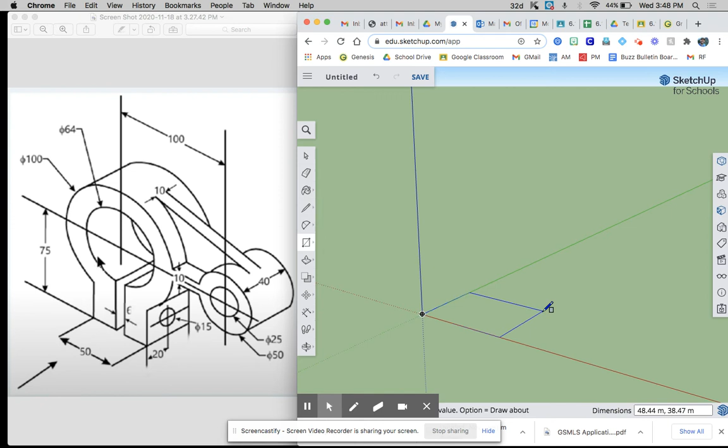Just to make the base, it says that this is 50 units wide, and here is 20, that's halfway, so the overall length would be 40. So we're going to start by making a rectangle that is 50 by 40. We have that, great.

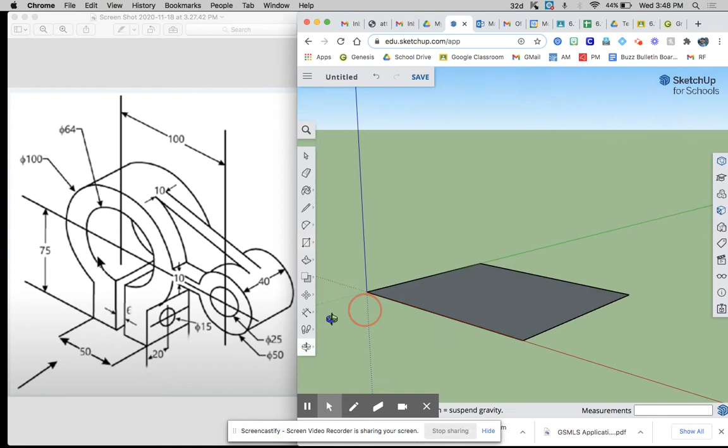This next part is really up to you how you do it, but I see that this says it's 75 from here up here. So what I'm going to do, and you could definitely do it another way, is pull this up 75.

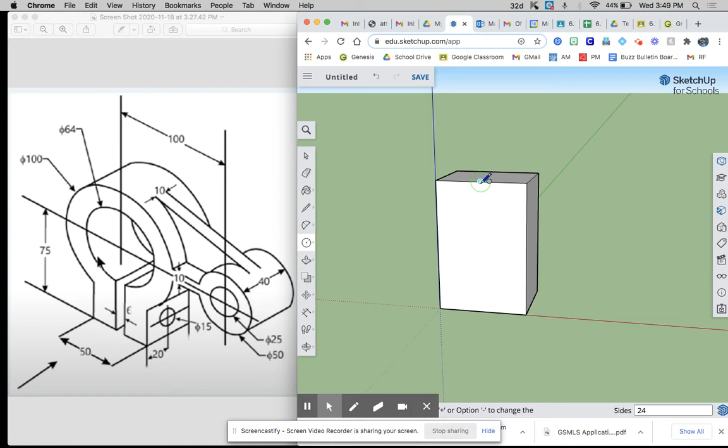Now the next thing lets you know that right here, top center, is going to be the center of the circle that you make. It says that the diameter of this first circle is 64, so remember to press the left arrow to lock it in. A diameter of 64 means a radius of 32. We can make this circle.

You can delete these edges, they don't really matter, you're gonna get rid of them soon anyway. And then this other circle has a diameter of 100, which means a radius of 50. So you're gonna make a radius of 50, and you get that.

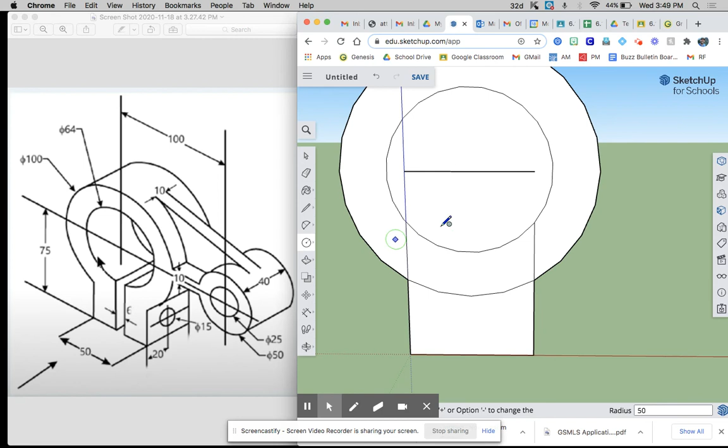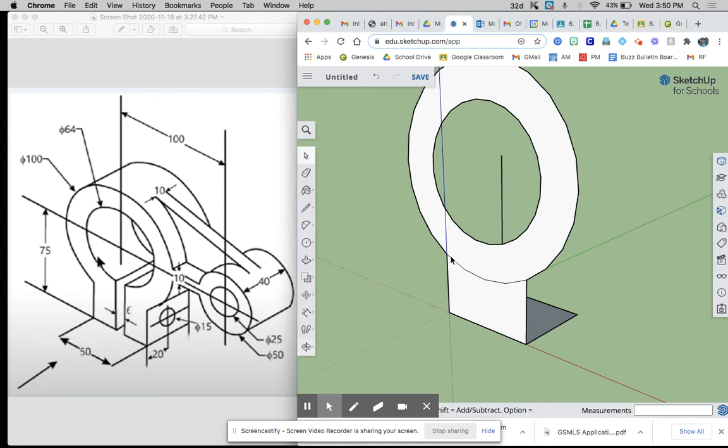So we can delete this line now. Pretty much you just want to have the overall shape of what we wanted to make. So remember, it's obviously opened up, you don't need any of this back stuff, you don't need any of these lines, that's something you're gonna have to delete. Even here, you probably don't need this line going across, and I forgot about this line here. Good, so we have that. Looks pretty similar to start.

Another thing is we can now pull this back because the overall whole thing is 40 deep. So you can use push-pull and really just pull it back so that it's on edge with that. Now it's really starting to take shape.

What you can do now is it says that it's 100 units from the center here to the center of this circle over here. So if you take the pencil tool, you can find the center and just follow this axis and measure 100. That lets you know this one, and you can see that it went through on the front, which is no big deal, that's fine.

It's actually kind of helpful for us. And now the center of this circle, it says has a diameter of 25, so once again you're gonna want to lock it on that green axis. A diameter of 25 means a radius of 12.5, so we have that. And the outside one, assuming it's perfectly centered, which we will assume, has an outside diameter of 50, which is going to be a radius of 25. Now we have that, and same thing, it has that width of 40.

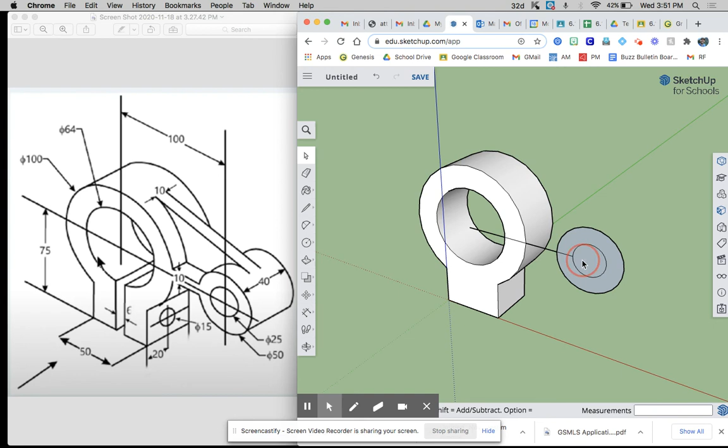So you can delete this, you can actually delete the middle, you don't really need this here. And then you can see that it's lined up with that side, so you're gonna use push-pull and pull this over 40. So these should be the same width, and it's kind of starting to really look how it's supposed to.

Now this connecting is actually pretty convenient for us, so we can kind of keep that there. We don't really need this middle line though, the line going through the center of this circle. And as long as this doesn't delete something, you can delete that too.

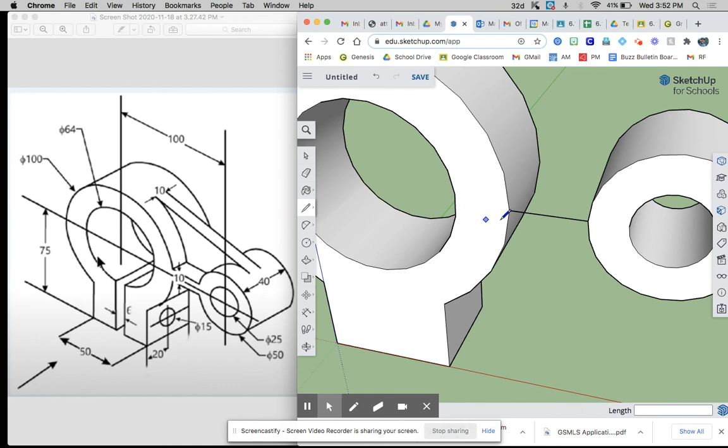So it does say that this, what connects the large circle to the smaller circle, is 10 units tall. But it seems like you could tell by the way that it's 10 units, so it's 5 units in each direction. So what you can do is go up the blue axis 5 units, and then go down the blue axis 5 units.

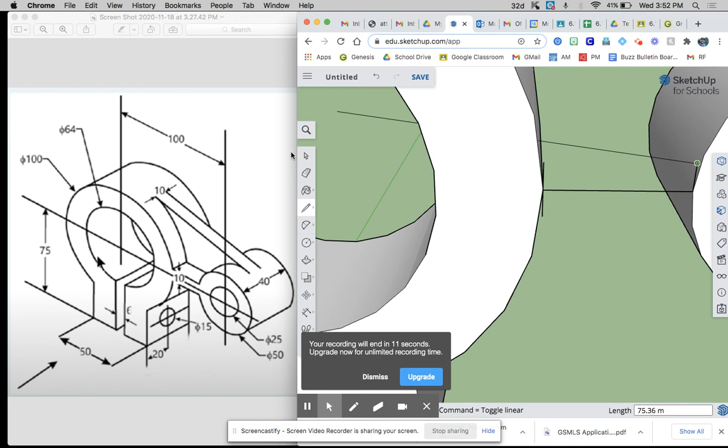And you're probably gonna want to do the same thing right over here. So you're gonna go up 5 units, it's got to be on the blue axis, so make sure it says on blue axis. And then we're gonna go down the blue axis 5 units. Okay, good, next video coming up.